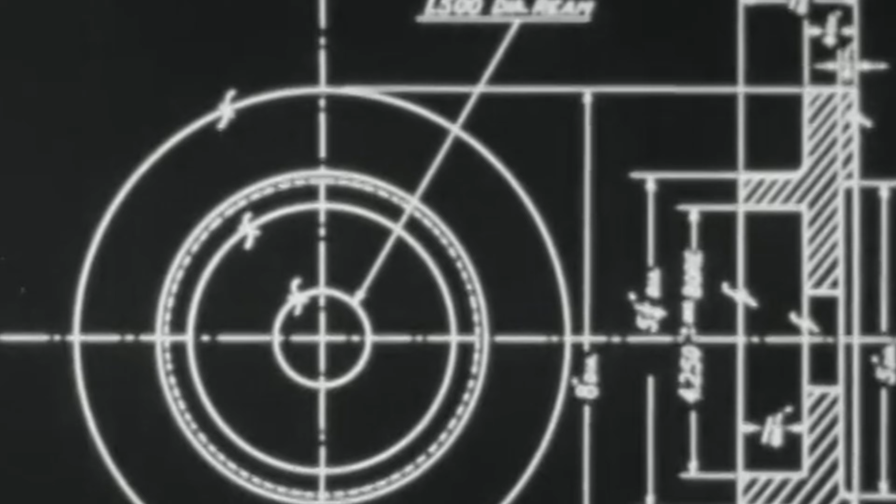In 1943, a small machine shop in Woonsocket, Rhode Island, shipped its 797th precision surface grinder. Three years earlier, that same shop had shipped its 130th. Do the math: in 36 months, while the world was burning, one company in a city most Americans couldn't find on a map produced over 600 precision grinding machines. Not rifles, not shells—machines that made the machines that made everything else.

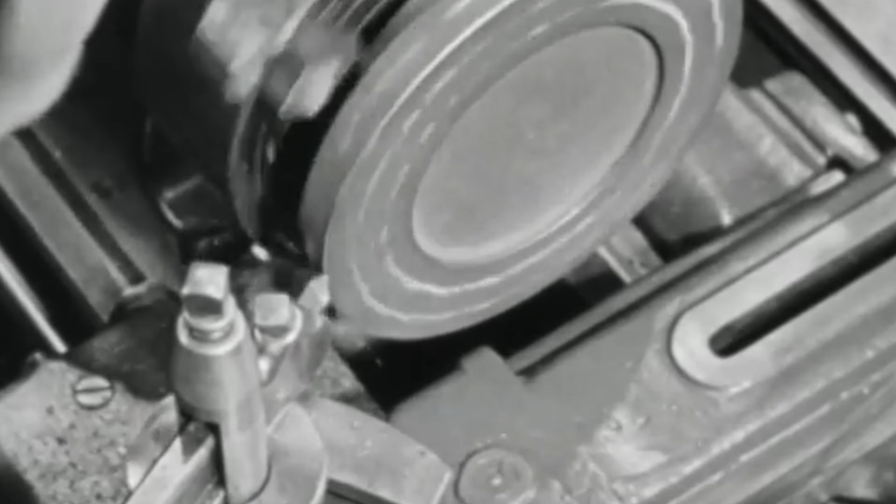Who builds something like that? Who even knows how? That kind of precision doesn't come from nowhere. It doesn't come from a government contract or a wartime miracle. It comes from 70 years of quiet, obsessive, unglamorous work in a mill town on the Blackstone River, by men who started out sewing fabric and ended up defining what flat means in American manufacturing.

This is the story of Taft-Peirce.

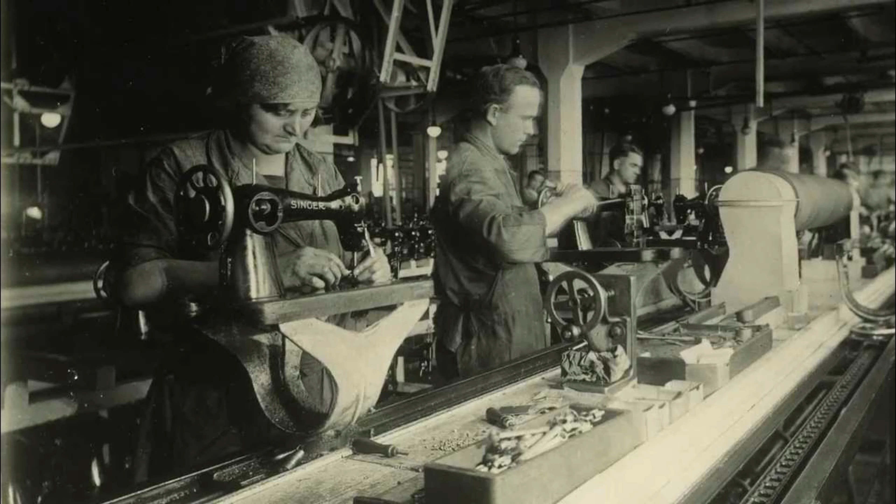April 2nd, 1875, Woonsocket, Rhode Island—a city built on water power and textile mills, where the Blackstone River had been turning wheels since before the Revolution. Someone opens a small machine shop and calls it the Houghton Sewing Machine Company. No fanfare, no ribbon cutting, just iron, oil, and the smell of cutting fluid on a cold New England morning. Who was Houghton? History doesn't dwell on him. What matters is what the shop became.

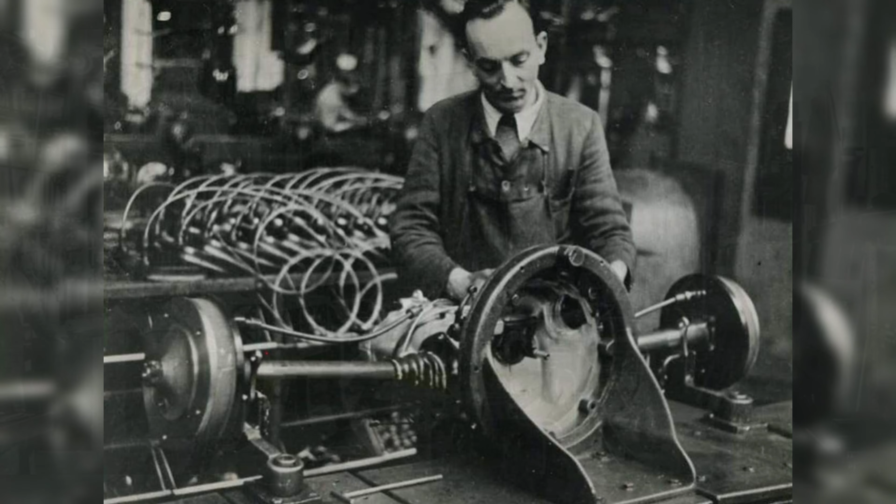By 1876, a young carpenter named Simon Wardwell had found his way through the door. He hadn't come to sew fabric, he'd come to understand machines. He learned the trade from the inside out, and by 1886, he owned the place. He renamed it the Wardwell Sewing Machine Company, incorporated it properly, and began pushing it beyond the original vision. Under his ownership, the shop wasn't just assembling sewing machines anymore.

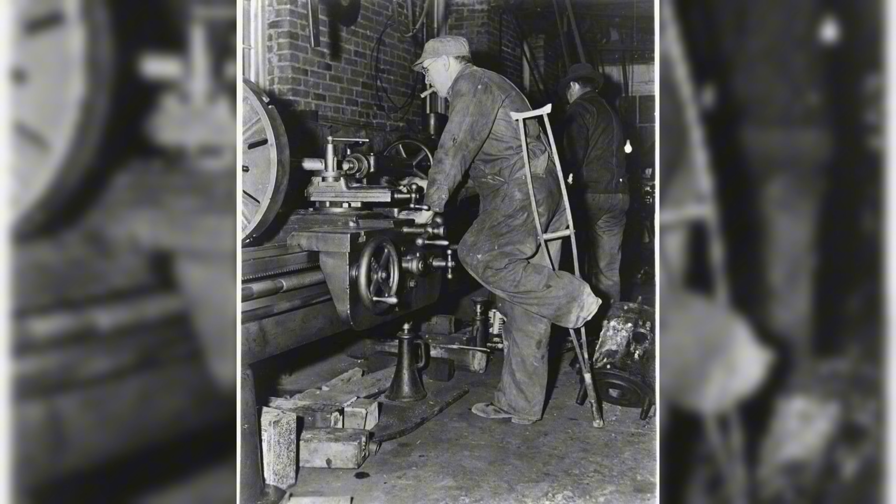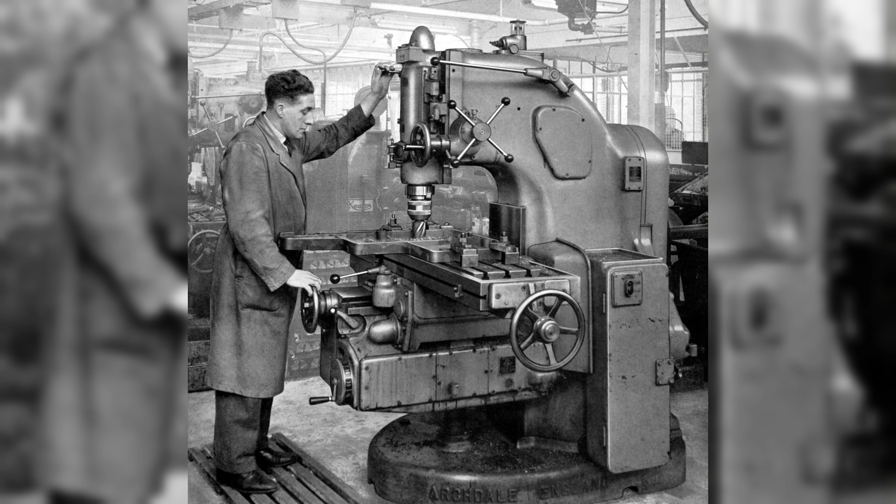It was solving problems for other manufacturers, taking on contract work, making parts, building things other shops couldn't or wouldn't attempt. And the man who made that possible was his plant foreman, a machinist named Edwin J. Peirce. Peirce was the kind of man American manufacturing was built on—not an inventor in the romantic sense, not someone with a patent and a dream, but someone who understood tolerance, who understood that the difference between a part that fits and a part that almost fits is the difference between a weapon that fires and one that jams, between an engine that runs and one that seizes. Peirce ran the floor, he set the standard, and he saw something Wardwell perhaps didn't fully see: that the real money, the real future, wasn't in sewing machines at all.

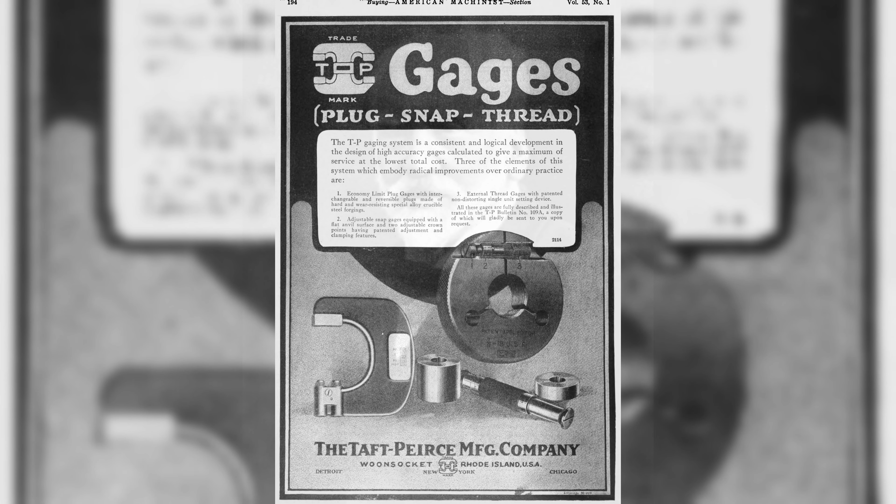It was in precision itself, in the ability to make things exactly right, on demand, for anyone who needed it. In 1895, Peirce acted on that vision. Together with a partner named Daniel W. Taft, he bought the assets of the company outright. The name changed immediately: Taft-Peirce Manufacturing Company. Two names, one idea—that a small shop in Rhode Island could hold tolerances that larger companies couldn't match.

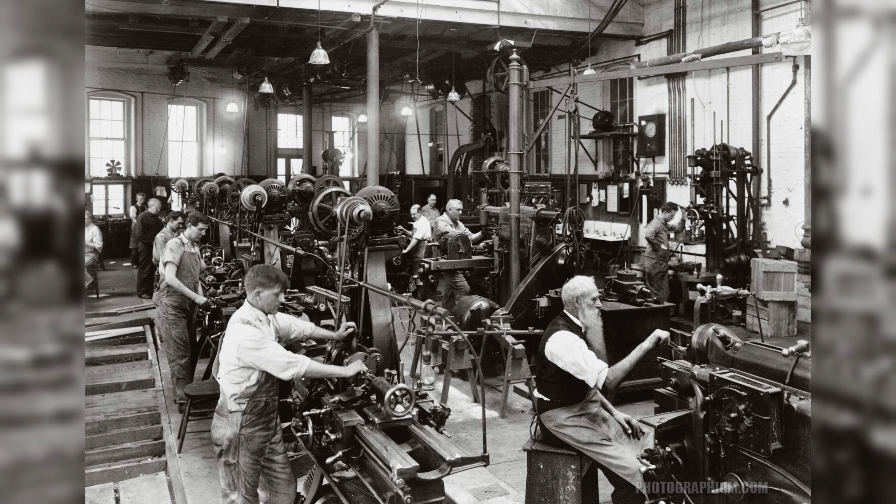But the early years were brutal. The new company tried to be everything at once. They built sewing machines, yes, but also typewriters. And remarkably, they manufactured the components of a punched card cost accounting system years before IBM made that technology famous. Three product lines, three sets of tooling, three sets of customers to chase. It was too much, too fast, on too little capital.

In 1903, Taft-Peirce went into receivership. That word, receivership, sounds like an ending. In this case, it was a filter. The men who didn't believe in the company walked away. The men who did stayed and fought.

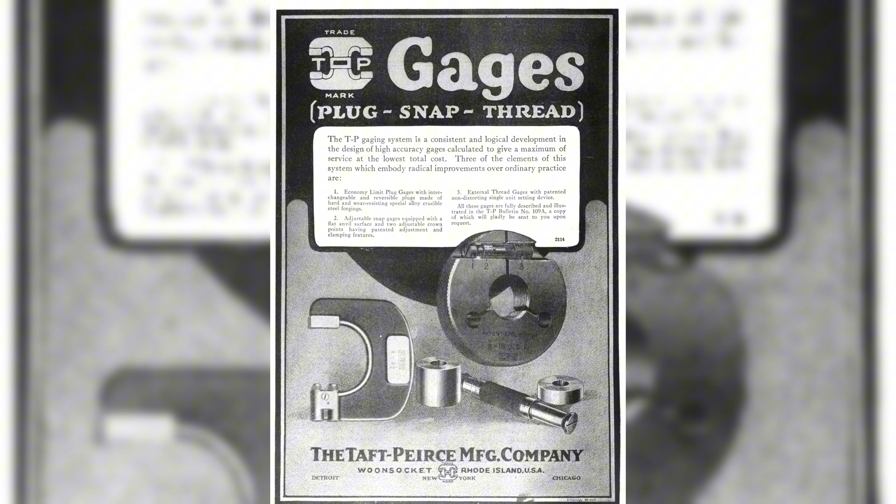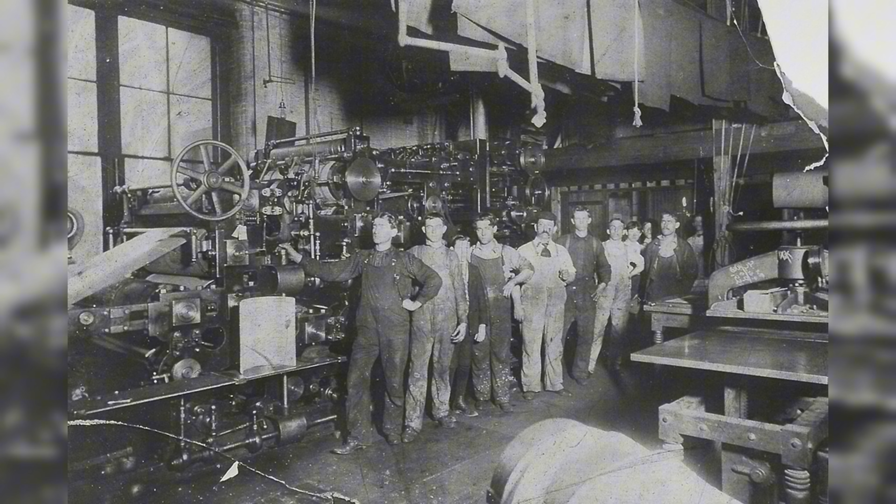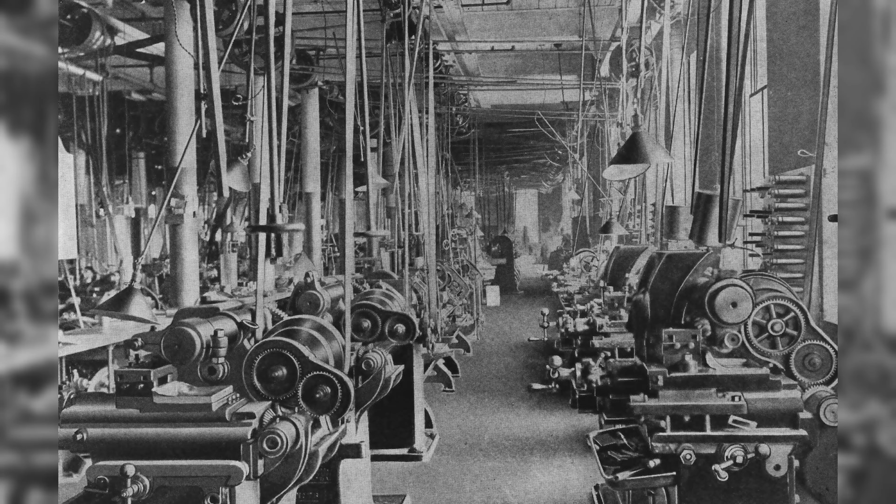A syndicate of investors moved in by 1905, led by an appointed receiver named Frederick Steele Blackall. He was an engineer, a businessman, and apparently a man who understood exactly what he was looking at when he walked onto that factory floor in Woonsocket, because the Blackall family would run Taft-Peirce for the next 80 years. Three generations, one company, one standard. The address: 32 Mechanic Avenue, Woonsocket, Rhode Island. Even the street name felt intentional.

By the time Frederick Steele Blackall took control of Taft-Peirce in 1905, the company had already survived one death. The question now was what it would become. Sewing machines were a dying game. The market was commoditizing, prices were collapsing, and every small shop in New England was chasing the same shrinking margin. Blackall understood something fundamental: the only way to survive in precision manufacturing is to become indispensable. Not cheaper, not faster—indispensable.

The pivot was gradual, then total. Taft-Peirce stopped trying to sell products to consumers and started solving problems for manufacturers. The Contract Service Division, which would eventually become what machinists across America called world famous, was the engine of that transformation.

If you had a part that had to be right, if you had a tolerance that couldn't be missed, if you had a job that other shops sent back with apologies, you sent it to Woonsocket. And Woonsocket delivered. But the moment that announced Taft-Peirce to the world didn't come from a gauge or a grinder.

It came from an aircraft engine. In 1911, a man named Victor Lougheed walked into the Taft-Peirce factory with a design. Victor was the elder brother of Alan and Malcolm Lougheed, the men who would go on to found what we now know as Lockheed Aircraft Company. Victor was the brilliant, difficult, visionary one, the one who understood aeronautics before almost anyone in America did.

And he had designed a V-8 aircraft engine that was, by any measure of the era, an act of mechanical ambition bordering on madness. The specifications were extraordinary. The entire engine was to be machined almost entirely from Krupp chrome-nickel steel, German steel, the hardest and most consistent available anywhere in the world at that time.

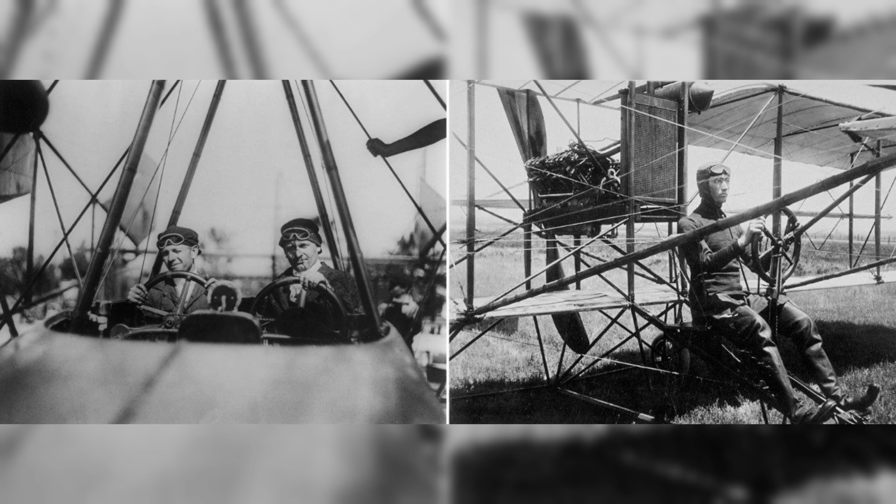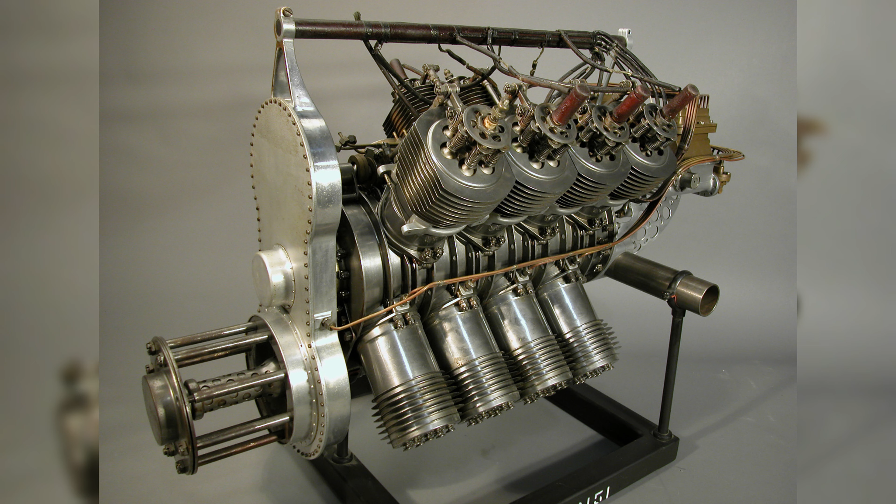The crankcase and cylinders were not to be cast in the conventional way. They were to be turned from solid billets. Each billet weighed approximately 2,000 pounds, 908 kilograms, before a single cut was made.

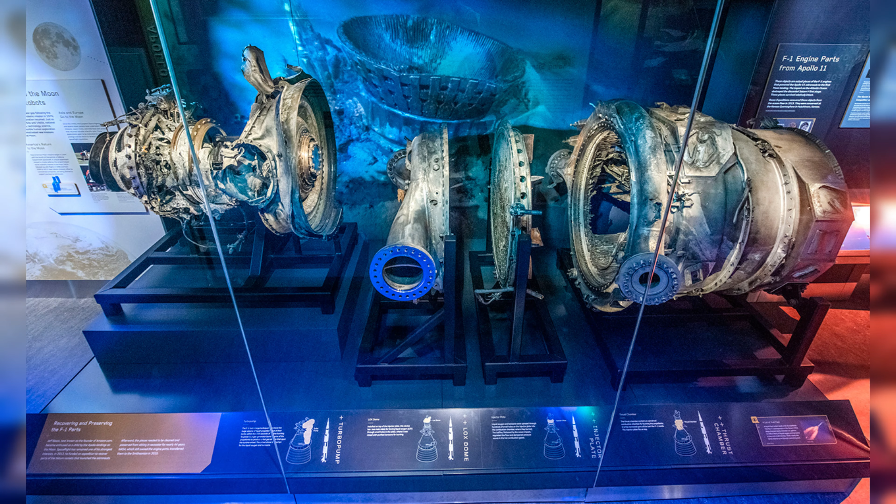The finished engine would have 6 poppet valves in the head of each power-producing cylinder. 8 air pumps projecting from the lower crankcase would maintain constant air compression, assisting cooling on the exhaust stroke. Fuel and lubrication were forced through bypasses in the cylinder walls and pistons themselves. The total cost, $15,000. In 1911, that is roughly $500,000 in today's money.

Could any other shop in New England have done this? Could any other shop in America? The fact that Victor Lougheed came to Woonsocket, not to Boston, not to New York, not to Detroit, tells you everything about what Taft-Peirce had already become by 1911.

The engine was completed. It was real. It ran. And decades later, Frederick Steele Blackall, Jr., by then president and treasurer of Taft-Peirce, personally donated it to the Smithsonian Institution's National Air and Space Museum, where it sits today. A machine made in a Rhode Island mill town, displayed among the artifacts of human flight.

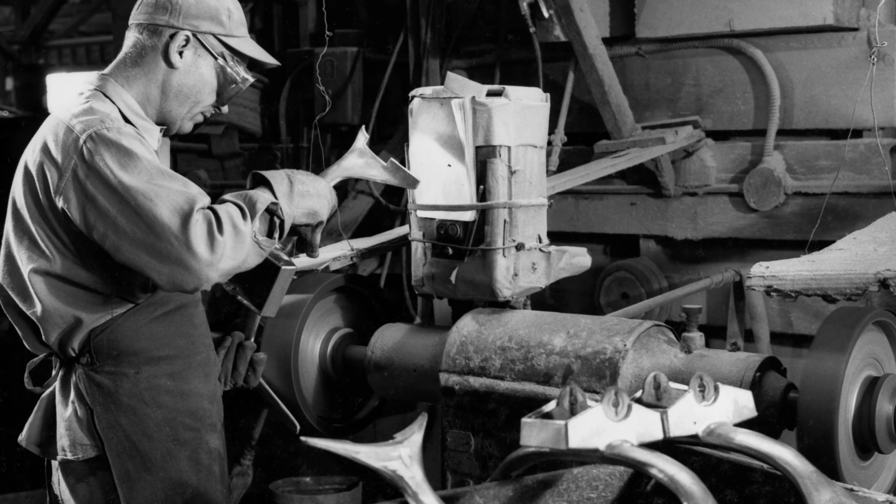If you want to understand what Taft-Peirce was capable of, you don't need a catalog. You need to stand in front of that engine and ask yourself who built it and how. But the Lougheed engine was a demonstration, not a business model. The real transformation came from something far less dramatic and far more consequential, the go/no-go gauge.

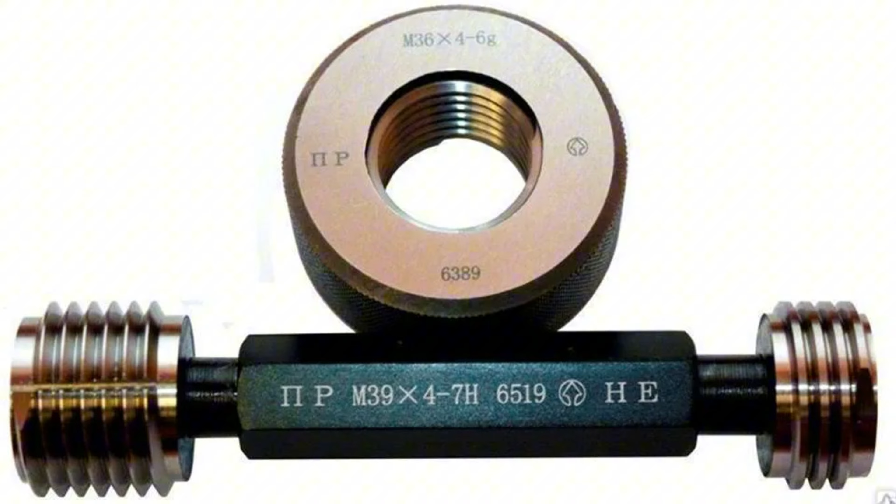A go/no-go gauge is one of the most important and least celebrated tools in the history of manufacturing. The concept is brutally simple. You make 2 gauges for every critical dimension. The go gauge must fit.

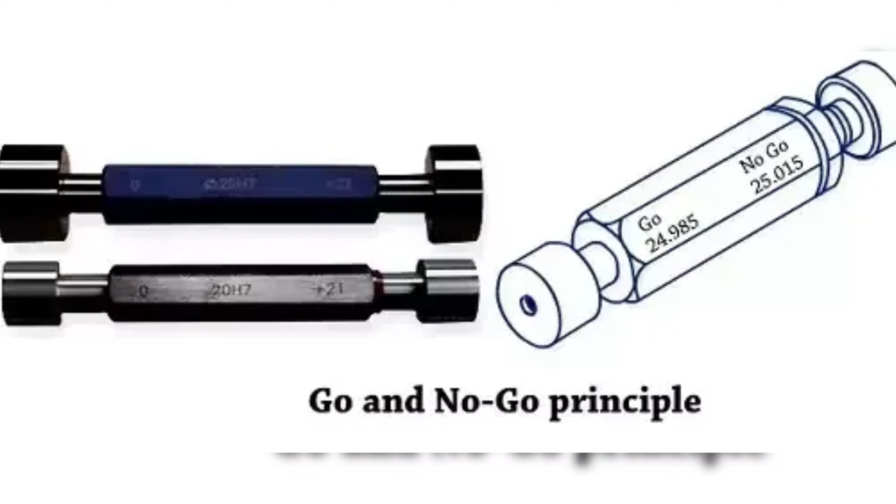If it doesn't, the part is too small. The no-go gauge must not fit. If it does, the part is too large. Pass both tests and the part is within tolerance. No measurement, no calculation, no room for human error or interpretation. Binary, absolute, right or wrong.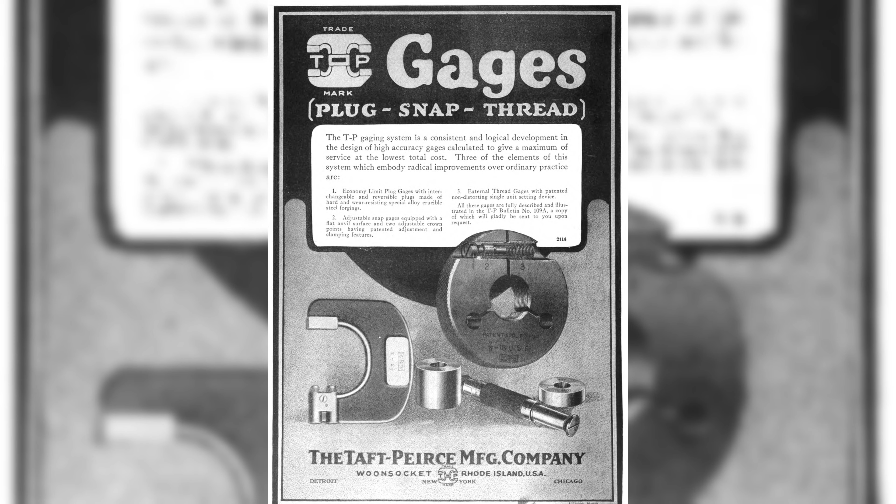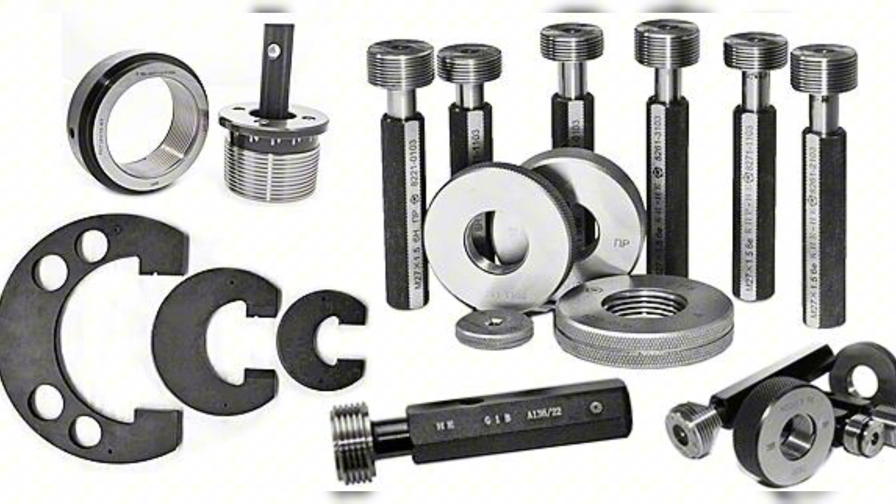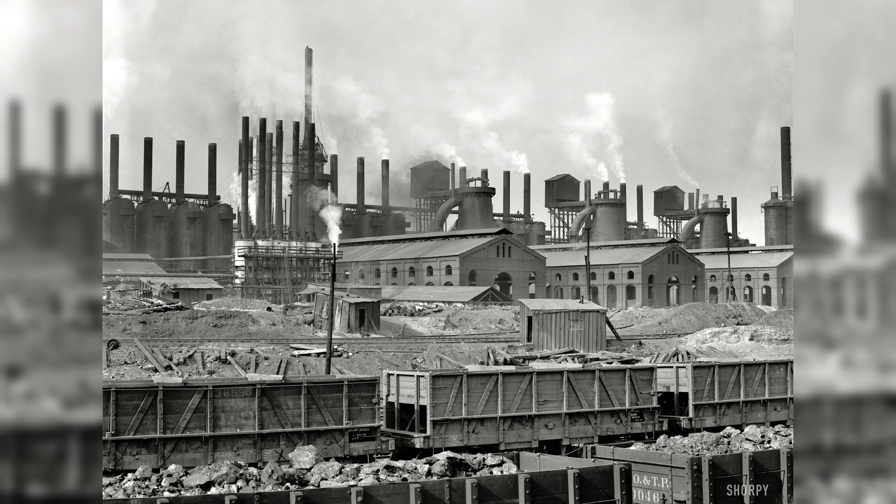Taft-Peirce became the definitive American manufacturer of these tools. Their gauges were ground and lapped to tolerances that, even today, command respect. Parallel within 0.0001 of an inch, square within 5 arc seconds, surface accuracy of 0.00005 inches per foot. These are not marketing numbers. These are published manufacturing specifications, numbers the company printed in catalogs and stood behind, in an era when most manufacturers wouldn't commit to tolerances in writing at all.

Why did American industry accept these as the standard? Because Taft-Peirce had something most companies talked about and few actually had, a policy of publishing their tolerances in print, openly, for any customer to verify. In a world where precision was often claimed and rarely proven, that transparency was revolutionary. You didn't have to trust Taft-Peirce, you could measure them. And American industry, aerospace, automotive, ordnance, toolmaking, measured them, and kept coming back.

There is a serial number ledger that tells the story better than any government document ever could. In 1940, Taft-Peirce shipped its 130th number 1 precision surface grinder. That number, 130, represents the entire production run of that machine from the moment it was introduced. Every grinder the company had ever built, up to that point, fit inside that number.

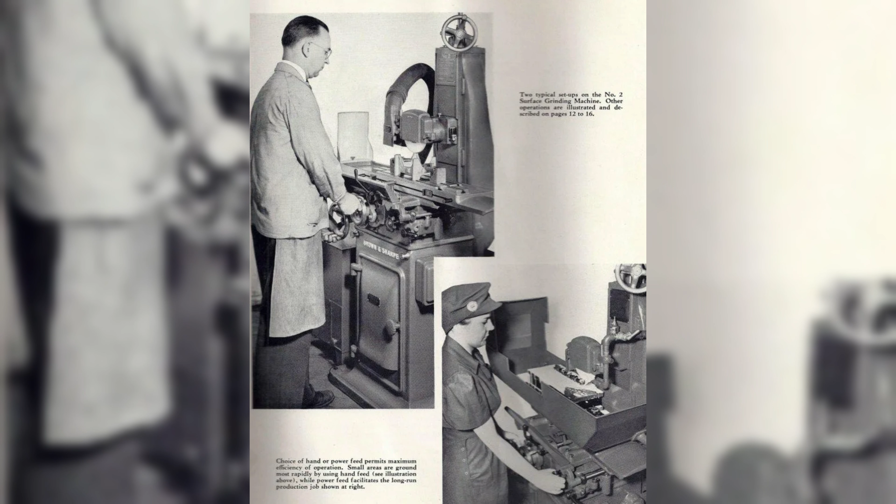Then the war came. By 1943, the serial number had reached 797. By 1945, it was 939. In 5 years, Taft-Peirce produced more precision surface grinders than it had built in all its previous decades combined. The factory floor on Mechanic Avenue didn't just scale up, it transformed.

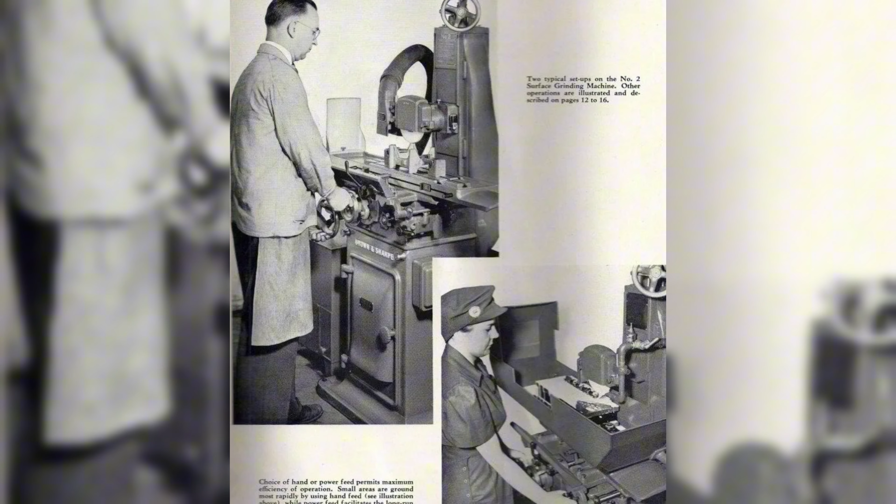A shop that had spent 40 years building a reputation for quiet, exacting work was suddenly running at a pace that would have been unrecognizable to Edwin Peirce. But here is the question that matters: what were those grinders for?

Precision surface grinders don't make weapons. They make the tools that make the parts that go into weapons. They are the machines behind the machines, the ones that ensure a breech block fits its receiver to within a 10,000th of an inch, that a gun barrel is truly cylindrical, that an aircraft engine mount is flat enough to hold alignment under combat stress. When a P-51 Mustang held formation at 30,000 feet over Germany, somewhere in its construction was a part that had been finished on a machine like the ones coming out of Woonsocket.

The men running Taft-Peirce during this period were the Blackalls, specifically Frederick Steele Blackall Jr., who had joined the company in 1922, fresh from MIT with a degree in engineering. He was not a soft man. He had served in the United States Navy in World War I, graduating from the Reserve Officers School at Annapolis in 1918. He understood what precision meant in a military context. He understood what happened when it failed.

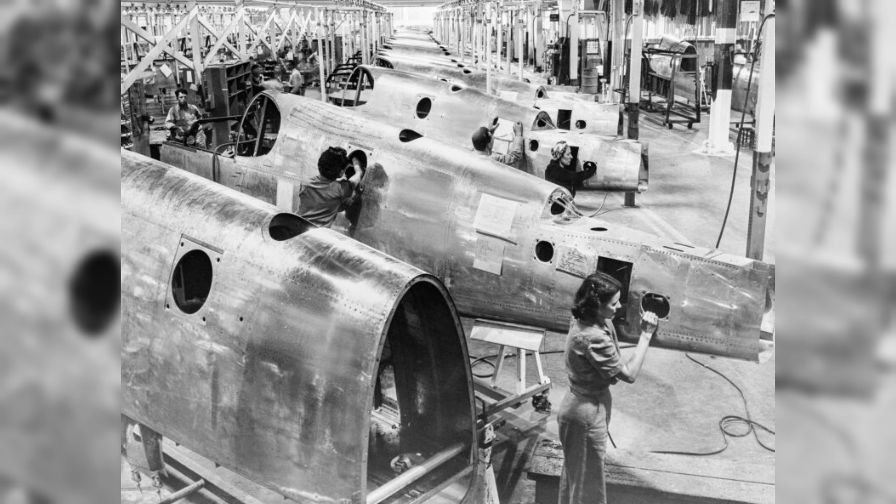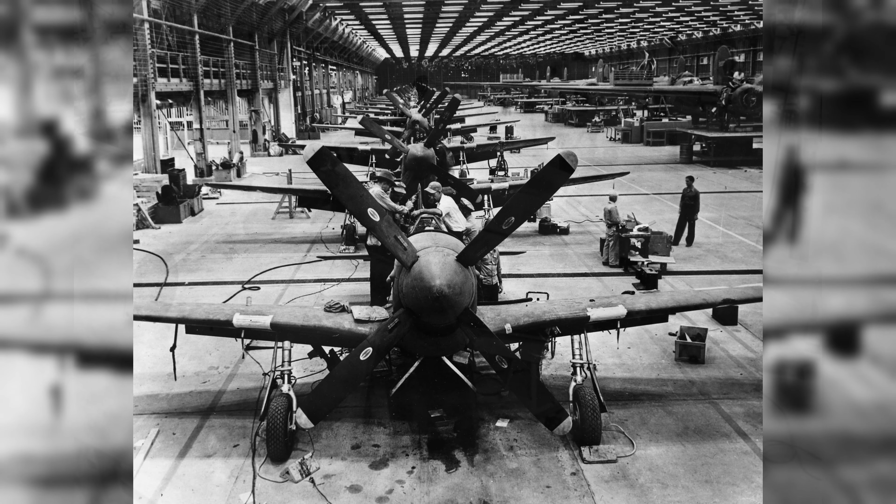Under Blackall Jr., the company's wartime operation was built around three pillars. First, the surface grinders themselves, machines being purchased by arsenals, aircraft plants, and ordnance facilities across the country that needed to maintain tight tolerances on critical components. Second, gauge production: go/no-go gauges, plug gauges, thread ring gauges, all the measuring instruments that American industry needed in enormous quantities the moment it shifted to war production.

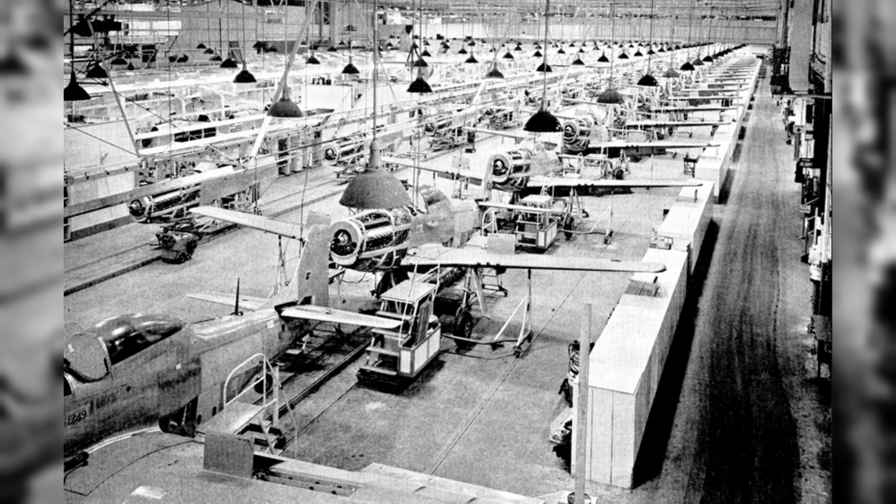When you are making a million rifle bolts, every single one has to be within tolerance. You need gauges by the thousands. Third, contract manufacturing, the direct production of precision components for systems the company was never publicly associated with, work that moved through the plant and disappeared into supply chains that led to ships, aircraft, and artillery.

There is one detail that survives in the memory of the building itself. One of the factory structures on the Taft-Peirce campus in Woonsocket is remembered by old machinists as the first building in the city to be fitted with automatic sprinkler systems. The reason, according to those who worked there: the work being done inside was considered too hazardous to risk a conventional fire response. What exactly was manufactured in that building has never been confirmed in the public record, but the sprinklers were real, and they were not installed for grinding gauges.

What the war taught Taft-Peirce was something that would define the company for the next five decades: scale is not the enemy of precision if you build your systems correctly. The wartime production run didn't produce 600 mediocre grinders. It produced 600 grinders that machinists are still hunting down, rebuilding, and running in their shops today, 80 years later. The quality didn't drop. The standard held. How many American manufacturers can say the same?

By the time the war ended in 1945, Taft-Peirce was no longer simply a respected Rhode Island machine shop. It was a proven defense supplier, a recognized standard setter, and a company whose products had touched virtually every branch of American military production. The quiet work on Mechanic Avenue had helped win a war that most of the world hadn't believed America could fight at industrial scale. And Frederick Steele Blackall Jr., the MIT engineer, the Navy veteran, the man who ran the floor through all of it, was about to take that legacy somewhere no one in Woonsocket had expected.

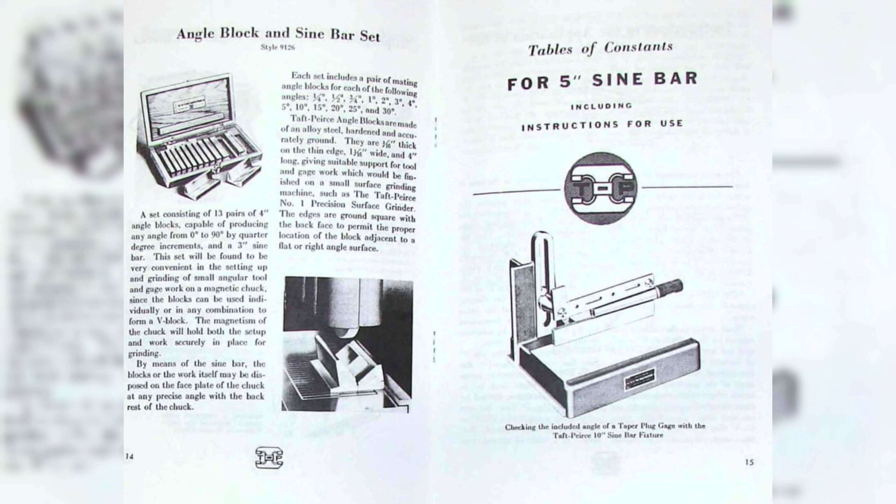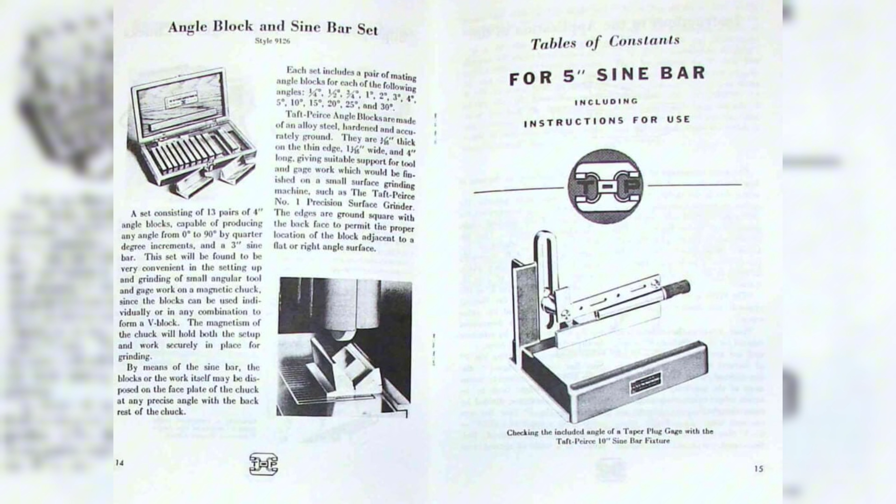The #1 answered those questions differently than its competitors. The spindle bearings were carried in solid brass ball and roller carriers, not the phenolic plastic components that other manufacturers moved to as costs rose and shortcuts multiplied. Brass: the kind of material choice that costs more, machines harder, and lasts decades longer.

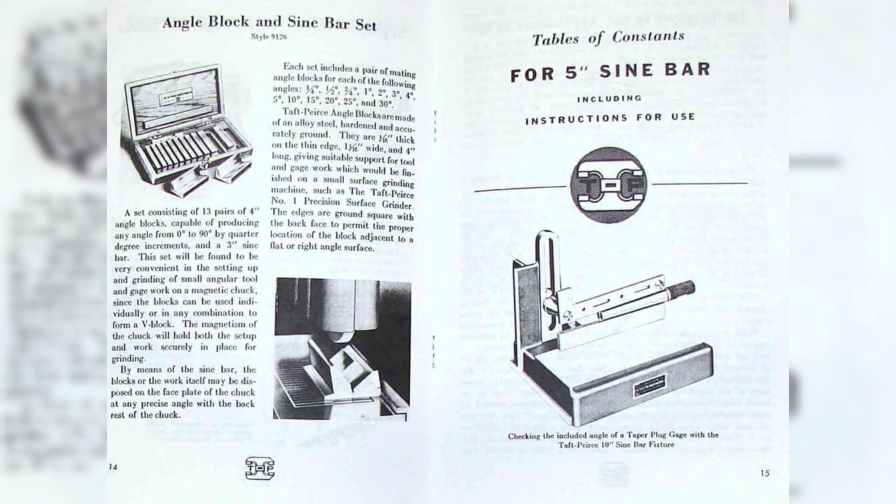The column was built for rigidity, not for lightness. The table travel was smooth in a way that machinists noticed immediately and remembered permanently. You didn't just use a Taft-Peirce #1, you felt it.

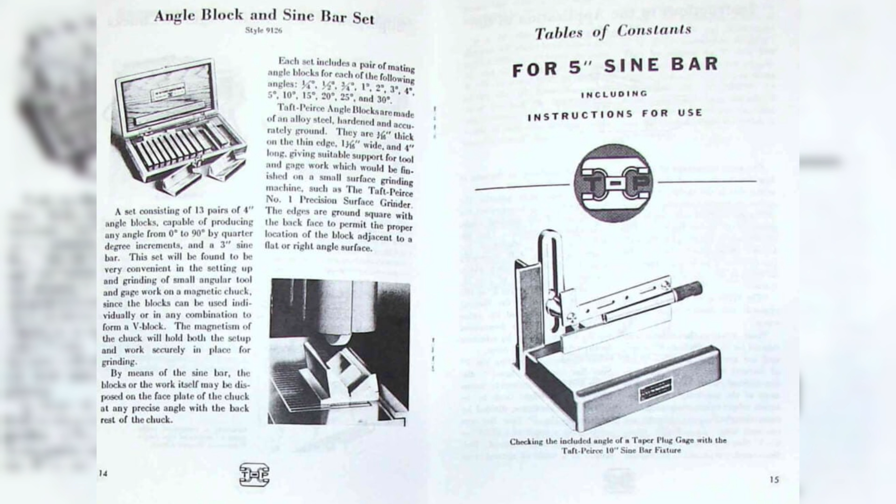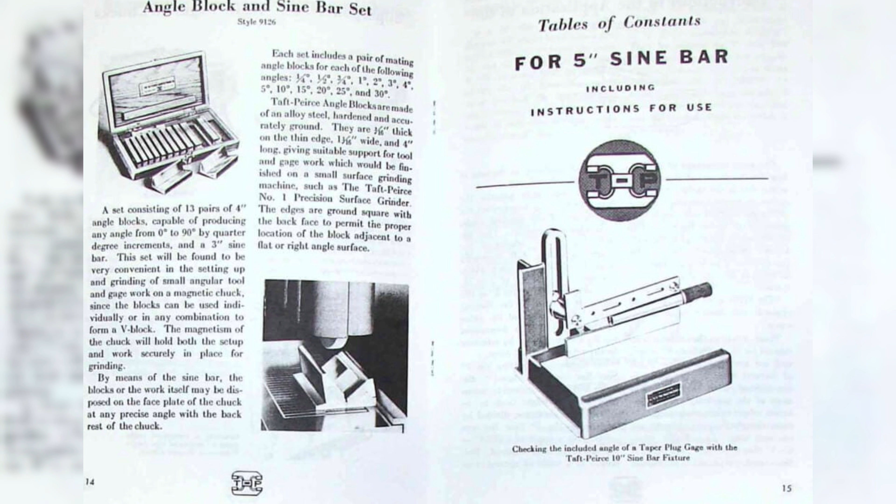The tolerances the machine was capable of holding were, for a manual surface grinder, extraordinary. Surface flatness achievable on a well-maintained #1 runs to plus or minus 0.0001 of an inch, 1/10,000th. That is approximately 1/4 the diameter of a human red blood cell, not under laboratory conditions, not with a temperature-controlled environment and a team of metrologists, but in a tool room, on a Monday morning, by a machinist who had been running the machine for 20 years and trusted it the way a surgeon trusts a good scalpel.

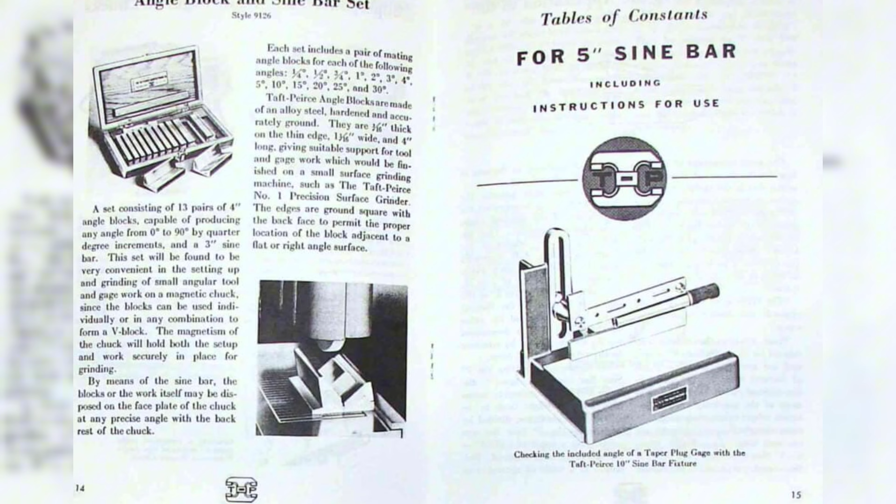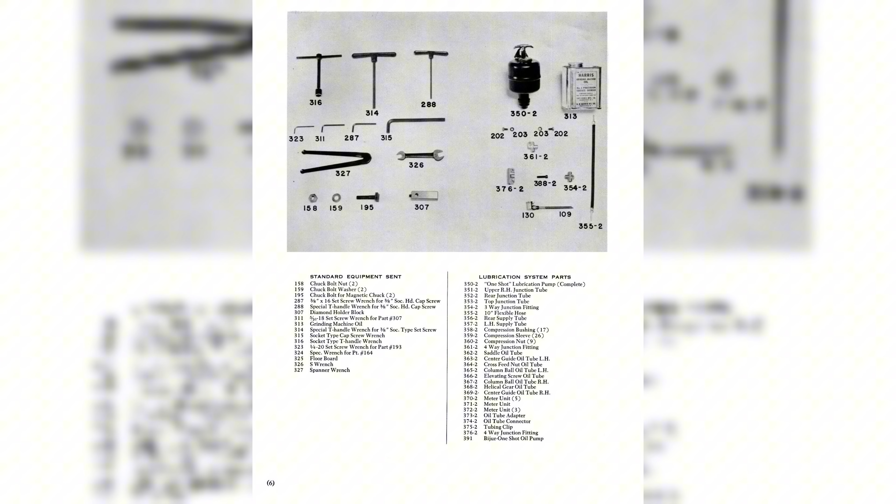Why does that matter? Because the parts being ground on these machines weren't decorative, they were functional. They went into dies that stamped aircraft skins, into jigs that held engine blocks during boring operations, into fixtures that positioned gun barrels for final inspection. Every 10,000th of an inch that slipped through on a surface grinder somewhere upstream became a tolerance stack somewhere downstream, and tolerance stacks in aerospace and ordnance have consequences that aren't measured in dollars.

Taft-Peirce understood this, and they built the #1 accordingly. The machine's reputation spread the way good tool reputations always spread in manufacturing, not through advertising, but through conversation. One toolroom foreman told another. One plant manager specified Taft-Peirce on a purchase order, and the purchasing department never questioned it again.

The #1 showed up in aerospace plants in Connecticut, in automotive tool rooms in Michigan, in ordnance facilities in Pennsylvania, in precision job shops from New England to California. It became the machine that serious shops bought when they were serious about their work.

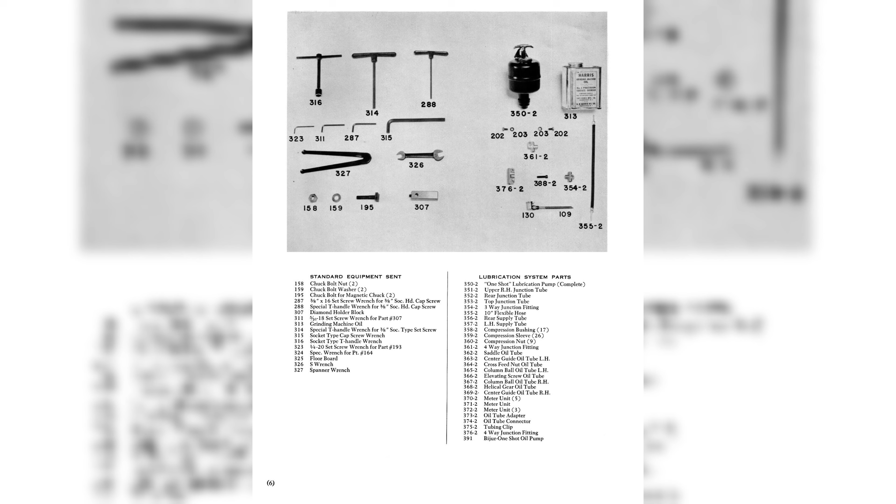And the company that built it was, by the mid-1950s, operating at the peak of everything it had been building towards since 1875: three generations of the Blackall family, 80 years of accumulated knowledge about what precision meant and how to deliver it. A product line that ran from individual gauges small enough to hold in one hand to surface grinders that weighed hundreds of pounds and would outlast the buildings they were installed in.

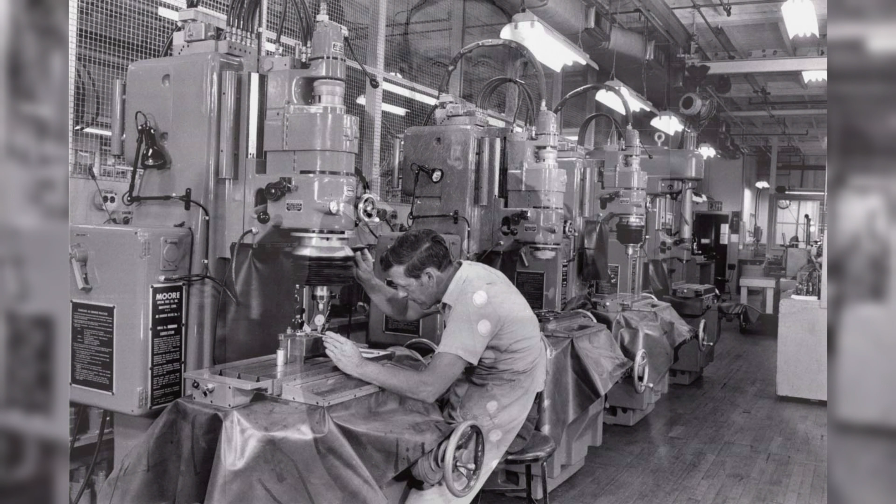The catalog from this era reads like a document from another civilization: hardened and ground parallels, box parallels, planer and boring mill parallels, leveling straight edges in cast iron and steel, toolmakers' adjustable knees, adjustable angle plates, universal right angle irons, bench centers, duplex bench blocks, cylindrical squares, sign plates, V-blocks, magnetic chucks in a dozen configurations, surface plates, adjustable reamers, every item listed with its actual manufacturing tolerance, in print, in ink, with no asterisks and no fine print. This was not a company selling hope, this was a company selling geometry.

And then, on July 6, 1963, something happened that no serial number ledger records and no catalog describes. Frederick Steele Blackall Jr., the MIT engineer, the Navy veteran, the ASME president, the man who had run Taft-Peirce through a world war and into its golden era, died in a plane crash near Sainte-Félicité on the Gaspé Peninsula in Quebec. He was 66 years old.

The loss was real, the kind of loss that hollows out an institution when the person who embodied its standards is suddenly gone. But the Blackall line did not end there. His son, Frederick Steele Blackall III, Yale class of 1945, born in Providence in 1925, had already been working at Taft-Peirce since 1949. He stepped into the role of president and treasurer and then chairman, and he would hold the company together for another 23 years, until 1986.

3 generations, 1 standard, 1 address.

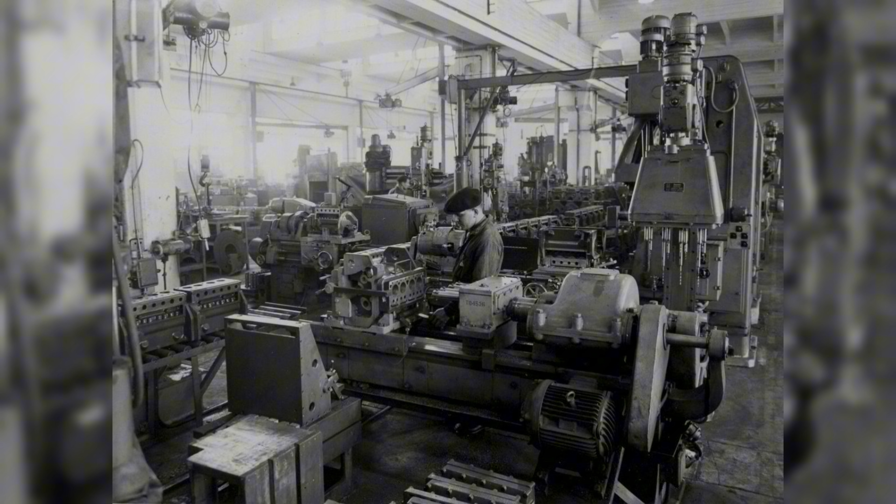But outside those walls, the world was changing in ways that no amount of precision could stop. In 1973, imported machine tools accounted for exactly 10% of the American market. A nuisance number, the kind of figure that gets mentioned in an industry report and forgotten by the time the coffee goes cold.

American manufacturers looked at that number and saw a rounding error. They should have seen a warning, because that number was not stable. It was a trajectory. By the end of the 1970s, imports had climbed to 22%. Still not catastrophic, but the direction was unmistakable, and the reason was not simply that foreign tools were cheaper.

Japanese manufacturers had done something far more dangerous than undercutting on price. They had matched American quality. In some categories, particularly in the emerging field of computer numerical control, CNC machining, they had surpassed it. And they had done it while American manufacturers were still debating whether CNC was a passing fad or the future of the industry.

It was not a passing fad. The Japanese machine tool industry had been essentially destroyed by World War II. By 1955, Japanese machine tools represented just 0.5% of world exports. Within 5 years, Japanese production had risen by a factor of 15. By 1960, American Machinist magazine, the trade Bible of the industry, was already noting that Japanese tools, for the first time, appeared to merit recognition and to be competitive with machines of the most advanced industrial nations.

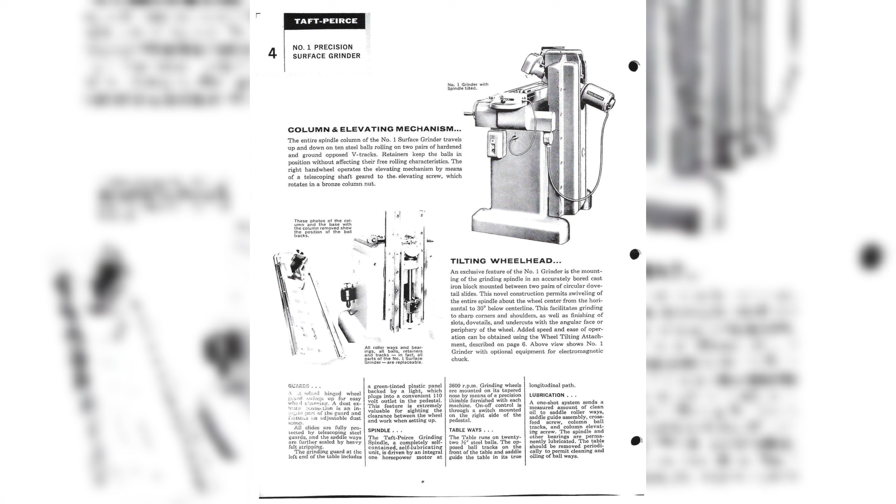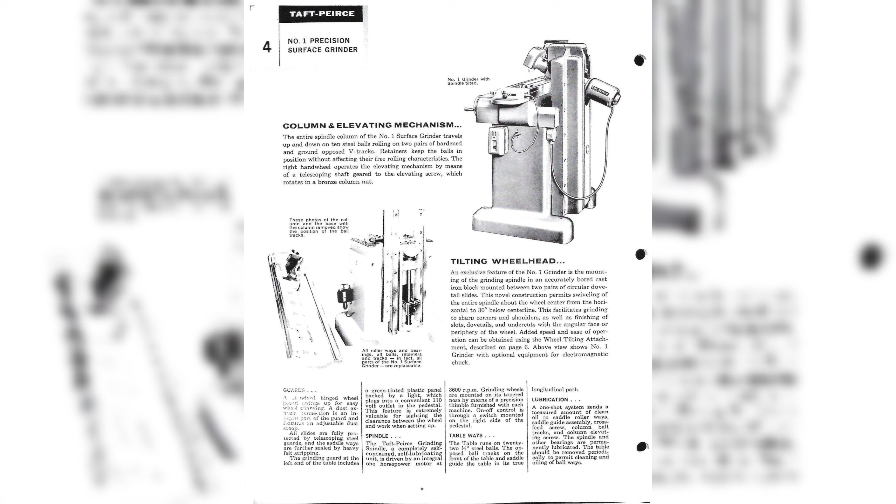American manufacturers read that sentence, nodded, and went back to doing what they had always done. That was the mistake. The recession of 1982 turned a slow erosion into a collapse. Machine tool sales in the United States fell from $5 billion in 1981 to just $2 billion in 1983. In 2 years, the industry lost 60% of its revenue.

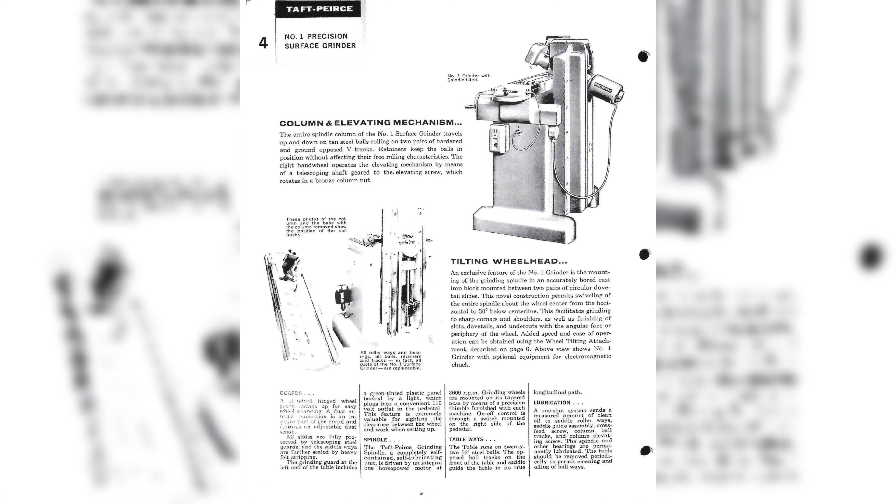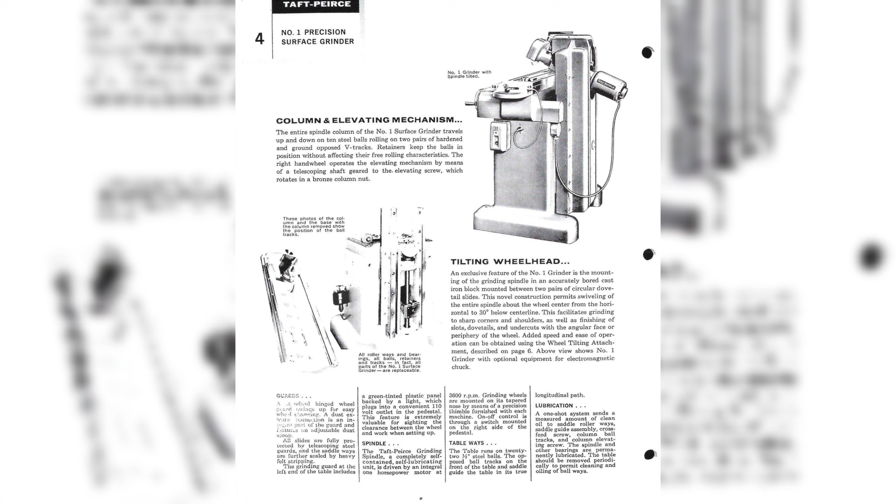From 1981 to 1983, employment in American machine tool manufacturing declined by 35%. 1 in 3 jobs, gone. And unlike previous downturns, where sales dropped and then recovered, this time the recovery never came. Not fully, not for most companies.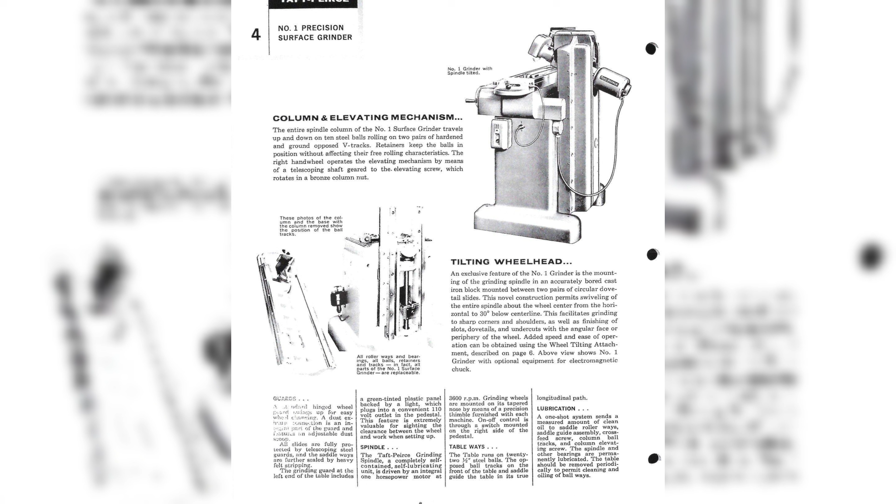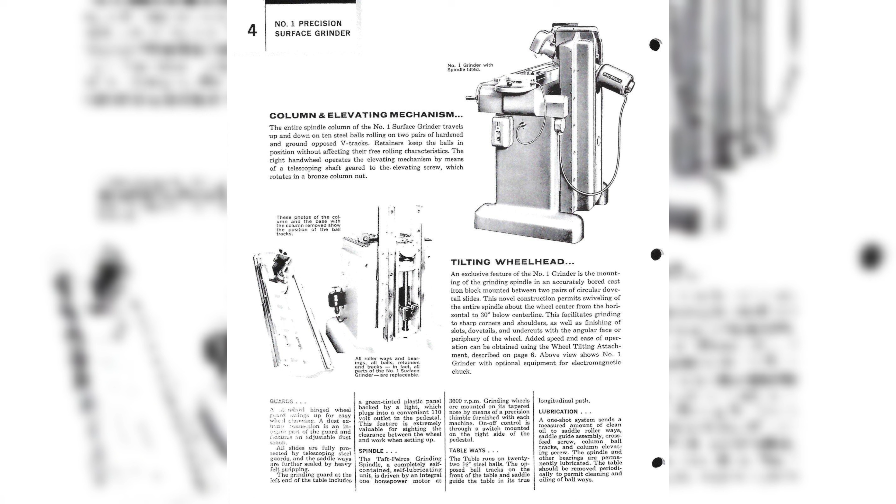By the mid-1980s, 75% of all CNC machines sold in the United States were imported. Japan alone controlled 50% of the American CNC market. The country that had invented numerical control technology, that had developed it in American universities with American defense funding, was now buying it back from Japan at a premium.

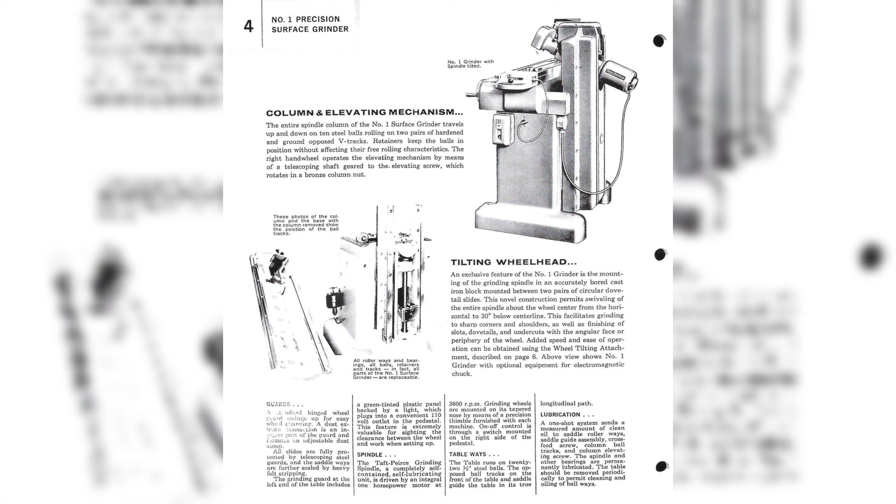How does that happen? How does an entire industry lose its own invention? It happens the way all industrial decline happens, not in a single dramatic moment, but in 100 small decisions that each seemed reasonable at the time.

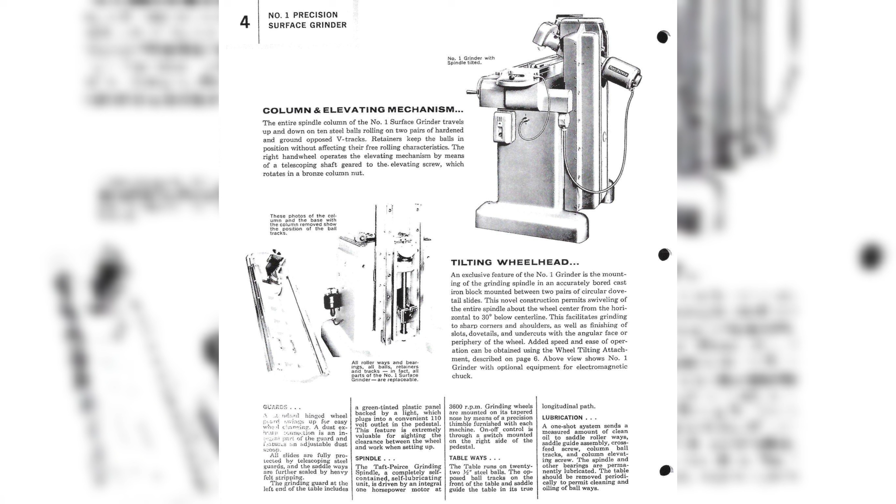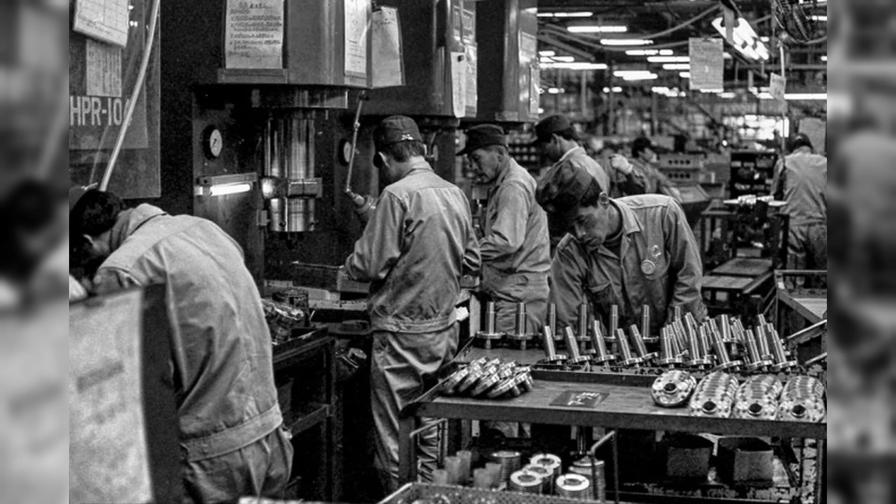American machine tool companies, most of them small and family-owned, struggled to finance the capital investment that CNC development required. Banks that had lent against physical assets for generations didn't know how to value software and electronics. The apprenticeship systems that had produced generations of skilled machinists were collapsing across New England and the Midwest, starving companies of the human capital they needed to innovate.

And the strong dollar of the early Reagan years made every American-made machine more expensive on the world market and every import cheaper in the domestic one. Meanwhile, Japanese manufacturers were operating with government backing, long-term bank relationships, and a manufacturing culture that treated precision as a national priority rather than a business variable. They were not just competing, they were executing a strategy, and the strategy was working.

The federal government eventually responded, but slowly and without conviction. Voluntary export restraints were negotiated with Japan in the mid-1980s, limiting the volume of certain machine tool categories that could be shipped to the American market. The restraints bought time. They did not buy competitiveness. American manufacturers who had hoped that protection would give them room to modernize found that the underlying problems, capital, skills, technology transfer, management culture, didn't respond to tariffs.

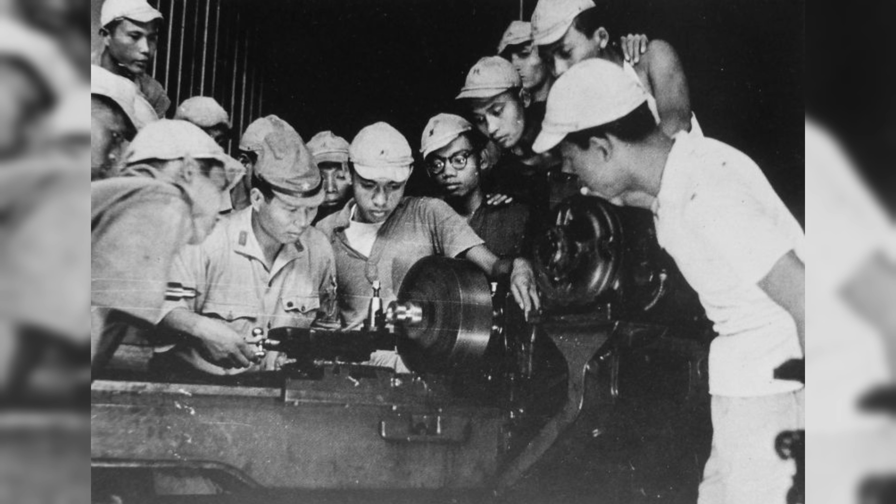Some companies died outright. Others were acquired by foreign manufacturers who wanted their customer lists and their factory buildings, but had no particular interest in preserving what had made them valuable. Brand names that had meant something in American tool rooms for 50 years were stripped of their engineering teams, run for cash, and eventually discontinued.

Taft-Peirce watched this happen and made a choice. The choice was not obvious, it was not guaranteed to work, and it required the company to be honest about something that family-owned manufacturers almost never want to admit, that the market they had dominated for decades was changing in ways they could not control, and that survival required becoming something fundamentally different from what they had been.

What was that choice, and did it save them?

The companies that died in the 1980s American machine tool collapse all made the same mistake. They tried to compete on Japanese terms, match the price, accelerate production, and cut costs in the places that were easiest to cut: materials, inspection, finishing tolerances. They discovered too late that those were precisely the places where their value had always lived. You cannot out-cheap a manufacturer with government backing, lower labor costs, a weaker currency, and 20 years of accumulated process improvement. You will lose that fight every time.

Taft-Peirce didn't fight that fight. What the company understood, and what Frederick Steele Blackall III understood specifically in the years before he stepped down as chairman in 1986, was that the #1 surface grinder was not their future, it was their past. The market for manual surface grinders in American industry was shrinking. CNC grinding centers were taking over production work. The shops that still wanted a manual grinder were increasingly willing to buy a Japanese or Taiwanese machine at half the price for work that didn't demand the last word in precision.

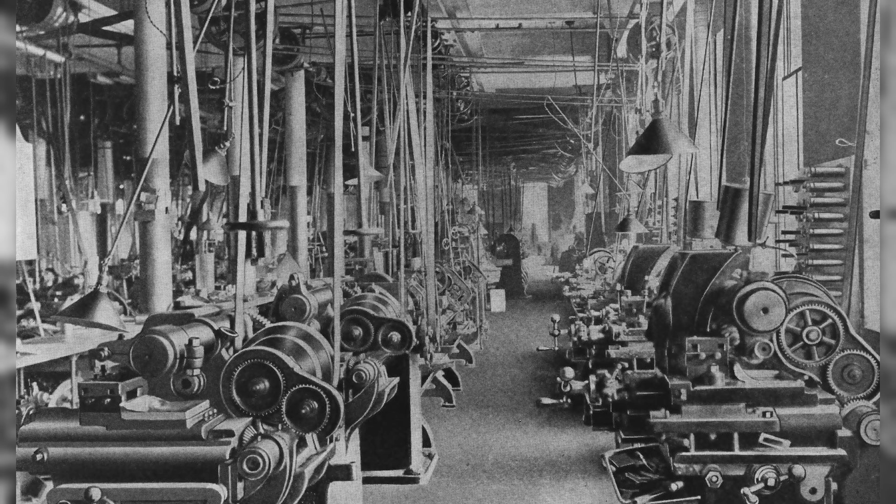These were not price-sensitive buyers in the way that a procurement manager choosing between 10 functionally identical CNC lathes is price-sensitive. These were people who understood what a bad angle plate cost them, not in purchase price, but in bad parts, failed inspections, and scrapped assemblies. When you are building a jet engine component that will be inspected to aerospace tolerances, the angle plate you use to set up that inspection is not a discretionary purchase.

It is a critical tool. And the person specifying it is not looking for the cheapest option. They are looking for the option they can defend to their quality manager, to their customer, to the FAA, to the DoD auditor who will eventually walk through their facility and want to know why every measurement in the quality record traces back to a piece of tooling.

Taft-Peirce had that standard. They had always had it. In a market that was fragmenting and cheapening around them, that standard became a competitive weapon rather than simply a point of pride. Was it enough?

In the short term, yes. The company survived the worst years of the 1980s collapse when competitors with larger production facilities and more exposure to the commodity machine tool market went under. The metrology focus gave them a defensible niche. The military contracts gave them a revenue floor. The contract service division gave them flexibility.

But survival in a niche is not the same as prosperity. And by the mid-1980s, when Blackall III stepped away from the chairmanship after 37 years of stewardship, the company he handed over was a shadow of what it had been at its peak. Smaller, narrower, still excellent, but excellent in a way that the market was increasingly unable to reward at the scale the company needed to sustain itself.

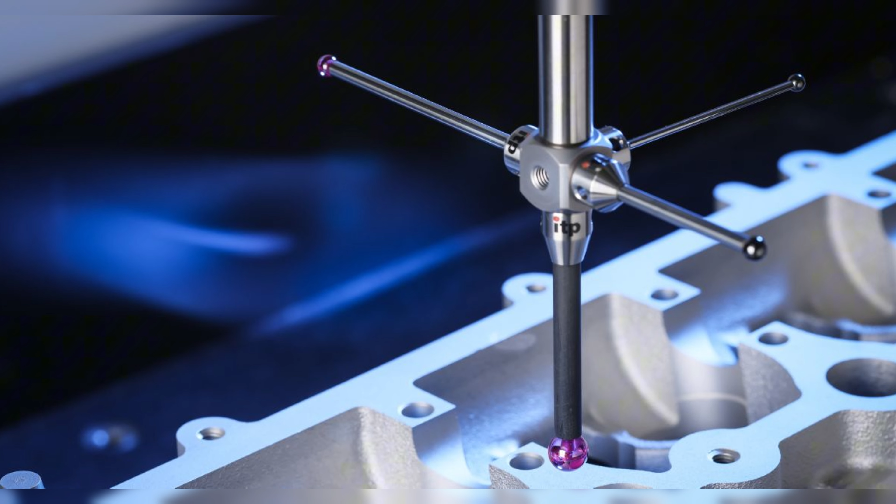The angle plates, the V-blocks, the sine plates, the parallels, the cylindrical squares, the magnetic chucks, all of it continued to be manufactured and sold under the Taft-Peirce metrology name, now a division of Suburban Tool. The tolerances were maintained, the standards were upheld, the military and government contracts continued, now flowing through Suburban's operation rather than through Woonsocket. Was that continuity, or was it something more complicated—a brand surviving the death of the institution that gave it meaning?

Is a Taft-Peirce angle plate made in Michigan by Suburban Tool the same thing as a Taft-Peirce angle plate made in Woonsocket by the men who developed the standard it was ground to? That question has no clean answer.

What has a clean answer is the tolerance. The angle plate is either square within 5 arc seconds, or it isn't. The surface is either flat within 0.00005 inches per foot, or it isn't. The standard doesn't care about the address on the shipping label. Maybe that is the most honest thing you can say about Taft-Peirce. In the end, the standard outlived the company.

There is a particular kind of institutional death that history finds difficult to dramatize. No hostile takeover, no leveraged buyout engineered by men in Manhattan who had never touched a surface grinder and never intended to. No activist investor demanding the liquidation of the tool room to unlock shareholder value. No single catastrophic decision that can be pointed to as the moment everything went wrong.

Taft-Peirce didn't die that way. It died the quieter, more honest, more devastating way—the way that most American manufacturing institutions of its generation died. It simply ran out of runway. The market it had served so well for so long had changed around it in ways that even the best management couldn't fully compensate for.

What was lost was knowledge, irreplaceable, uncodifiable, embodied knowledge, the kind that lives in the hands of a machinist who has ground 10,000 angle plates and knows by feel when the lap is cutting right and when it isn't, the kind that lives in the metallurgical specifications developed through a century of documented trial and error, the kind that lives in the institutional memory of a company that had been solving the hardest precision problems in American industry since before the Wright brothers flew.

That knowledge doesn't transfer cleanly. Some of it dies with the people who held it. Some of it survives in the products themselves, in the machines and tools still in service, still holding tolerance, still doing the work they were built to do. Some of it survives in the practices of the machinists who were trained on Taft-Peirce equipment and carried those habits of precision into whatever they did next.

But the institution was gone. The address on Mechanic Avenue was silent, and the name that had meant something specific and verifiable and trustworthy in American tool rooms for 100 years was now available. Someone picked it up.

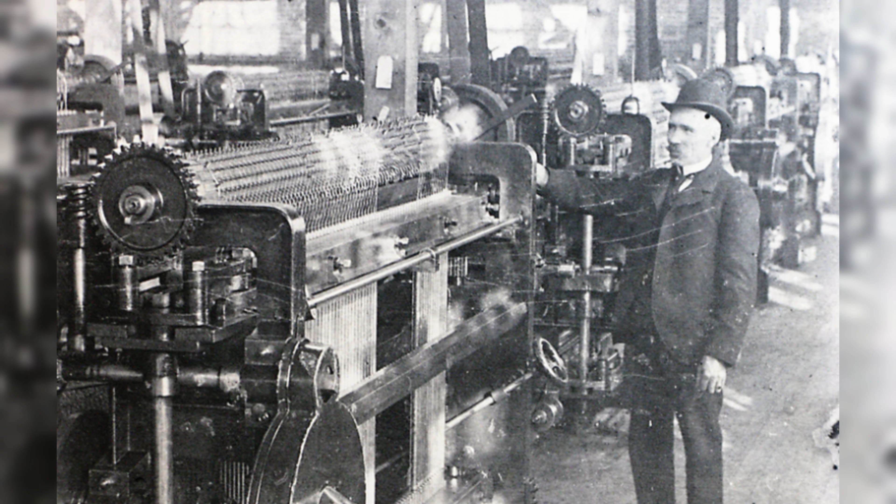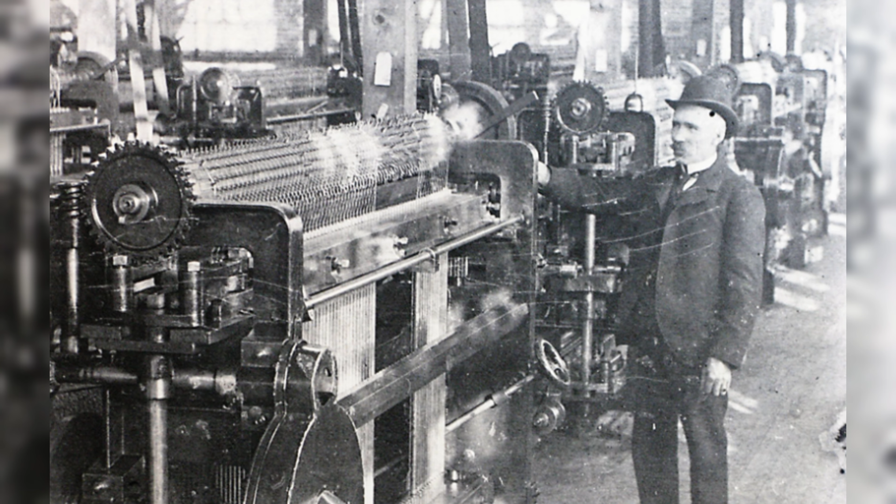Suburban Tool Incorporated, based in Michigan, had been building precision workholding and inspection equipment for decades. They understood the market. They understood the customer base. They understood what the Taft-Peirce name meant to toolroom engineers who had been specifying it on purchase orders their entire careers. And they understood that a name with that kind of accumulated credibility, a name that traced directly to 100 years of published tolerances and verified precision, was worth preserving.

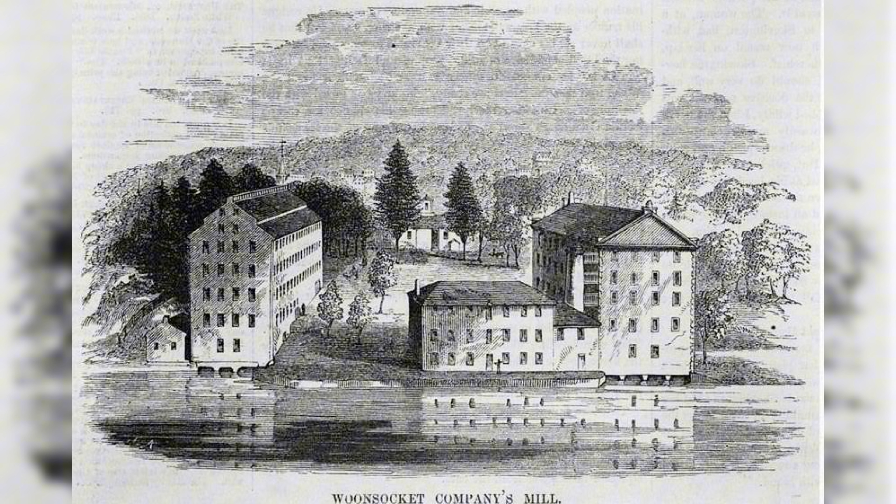Suburban acquired the Taft-Peirce product line and the rights to the name. They did not acquire the factory. They did not acquire the workforce. They acquired the intellectual property, the designs, the specifications, the catalog, the standard, and they folded it into their own manufacturing operation in Michigan. The products continued.

The angle plates, the V-blocks, the sine plates, the parallels, the cylindrical squares, the magnetic chucks, all of it continued to be manufactured and sold under the Taft-Peirce metrology name, now a division of Suburban Tool. The tolerances were maintained. The standards were upheld. The military and government contracts continued, now flowing through Suburban's operation rather than through Woonsocket.

Was that continuity? Or was it something more complicated? A brand surviving the death of the institution that gave it meaning? Is a Taft-Peirce angle plate made in Michigan by Suburban Tool the same thing as a Taft-Peirce angle plate made in Woonsocket by the men who developed the standard it was ground to? That question has no clean answer.

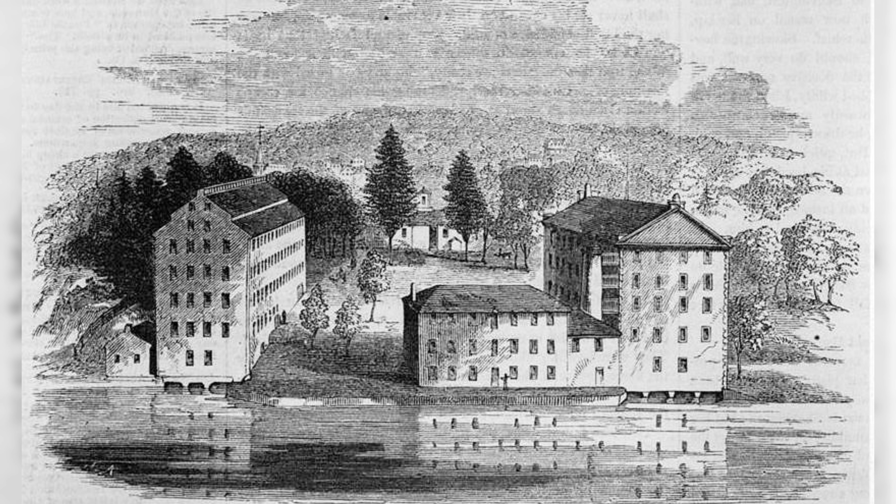What has a clean answer is the tolerance. The angle plate is either square within 5 arc seconds or it isn't. The surface is either flat within 0.00005 inches per foot or it isn't. The standard doesn't care about the address on the shipping label.

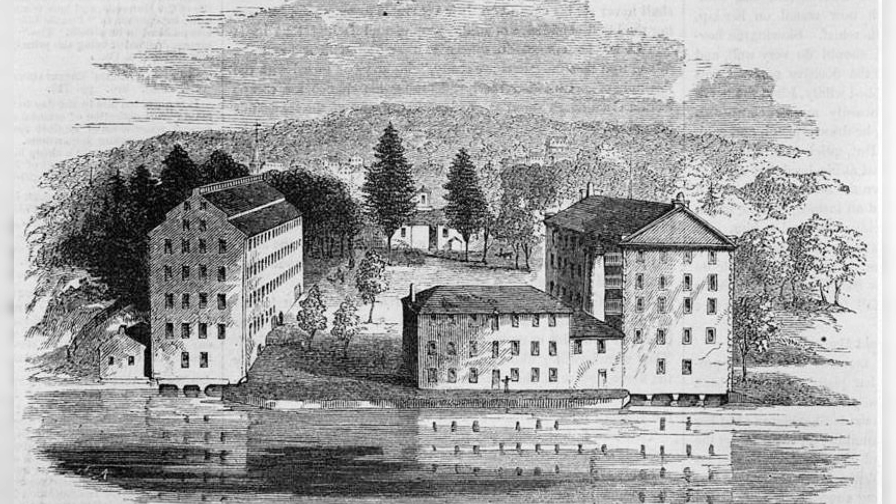Maybe that is the most honest thing you can say about Taft-Peirce. In the end, the standard outlived the company. When a knowledgeable machinist finds one in decent condition, the reaction is not nostalgia, it is calculation.

These machines, properly rebuilt, are capable of holding tolerances that many modern budget grinders cannot match. The brass bearing carriers that other manufacturers abandoned for cost reasons in the 1950s and 1960s turn out to have been the right engineering decision all along. The rigidity built into the column, which made the machine heavier and more expensive to ship, turns out to matter enormously when you're trying to hold a tenth over a 12-inch traverse. The decisions Taft-Peirce made when they built these machines, decisions that seemed expensive and perhaps overcautious at the time, look like wisdom from the distance of 80 years.

Rebuilt Number 1 grinders sell today for anywhere between $2,000 and $8,000, depending on condition, provenance, and what work has been done to the spindle and ways. For a machine built before 1950, whose manufacturer dissolved 30 years ago, with no warranty, no spare parts availability from the original builder, no factory support of any kind, machinists buy them anyway — because the machine works, because it was built right, because some standards don't expire.

The used Taft-Peirce metrology tools — the angle plates, the V-blocks, the sine plates, the parallels — tell a similar story. A set of Taft-Peirce hardened and ground parallels from the 1960s, found at an estate sale or an industrial auction, will typically sell for more than a comparable new set from a budget supplier. Not because of sentiment, but because professionals know the difference between a parallel ground and lapped to a published tolerance by people who cared about it, and one produced to a price point by people who cared about the margin. The market has made that judgment clearly and consistently for 30 years since the company closed.

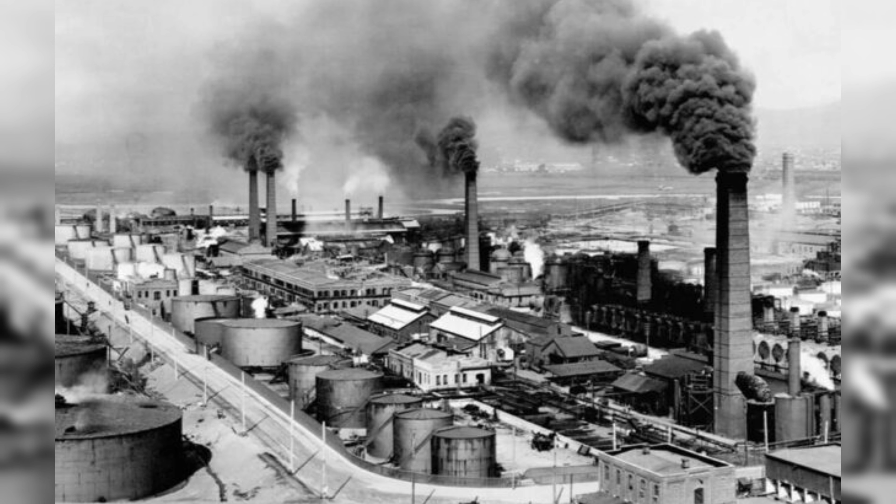Is that enough? Is a name enough when the institution behind it is gone? When the factory is silent and the workforce is dispersed and the accumulated knowledge of 120 years of precision manufacturing exists only in the products themselves and in the fading memories of the men who made them? There is no satisfying answer to that question. What there is, instead, is a measurement — and the measurement is within tolerance.

For a company built on the proposition that tolerance is the only thing that matters, that the difference between right and almost right is the only difference worth caring about, perhaps that is the only epitaph that would have meant anything to the men who built it. The standard outlived the company. In Woonsocket, the river still runs.

Go back to that number, 797. In 1943, while the world was deciding what it would become, a factory on Mechanic Avenue in Woonsocket, Rhode Island, was running three shifts and shipping precision surface grinders to arsenals, aircraft plants, and ordnance facilities across a country fighting on two oceans simultaneously. Serial number 797 — a number stamped into iron by men who had no way of knowing that the machines they were building would still be running in tool rooms 80 years later, still holding tolerance, still doing work that matters.

That number is not just a production statistic. It is a statement about what American manufacturing was capable of when it took precision seriously, when it understood that the difference between a part that fits and a part that almost fits is not a rounding error. It is the difference between a system that works and a system that fails — when it built things not to a price point, but to a standard, when the standard was the point.